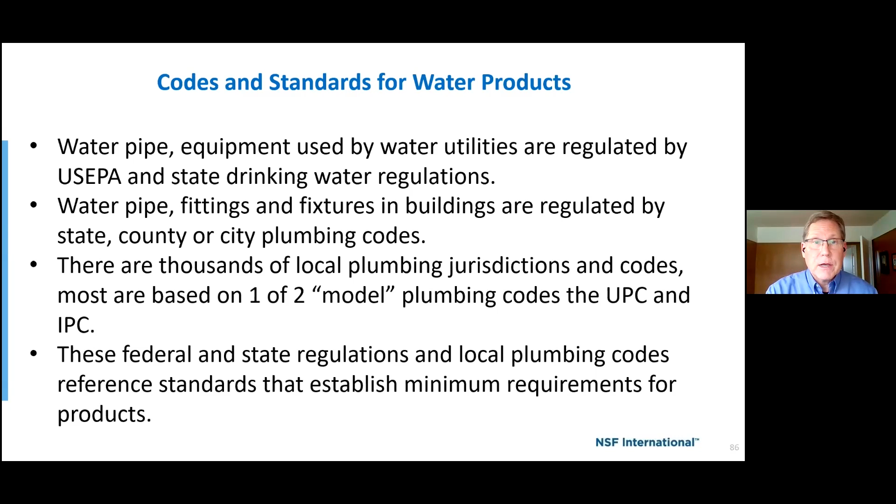And the good news for the plastics industry is that the model codes are becoming more pro-plastic. The international plumbing codes have been very accepting of plastics for the past decade or so, and many of the restrictions on plastics from the Uniform Plumbing Code have been lifted. One of the most recent examples of a restriction that was lifted is related to cured-in-place pipe liners. So these plastic liners were restricted from being used to repair cast iron drain pipe. And this was backed by an effort to encourage replacement of cast iron rather than using plastics.

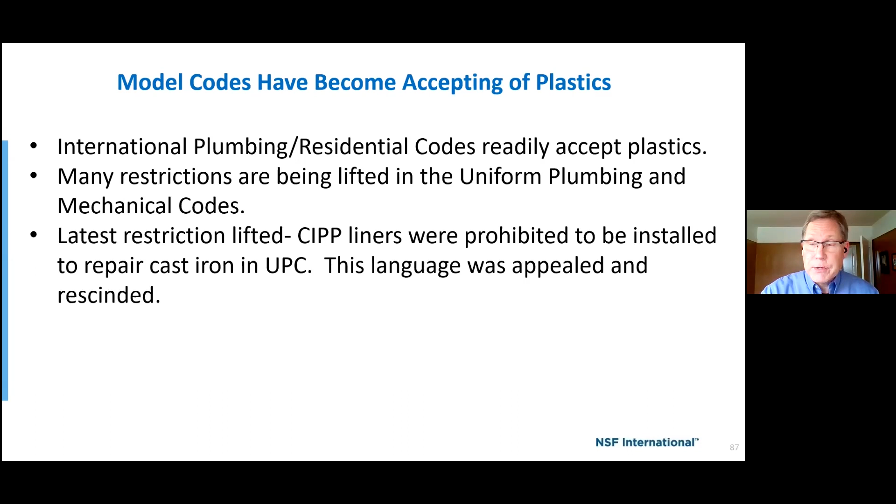So this decision was appealed by the National Association of Sewer Service Companies with the IAPMO Board of Directors, and the restriction was lifted. So I think that's a positive trend. I believe it's getting harder and harder to impose restrictions on plastics for political reasons. But I'd certainly like to hear about your experiences as well. So next slide.

And when it comes to the development of the model plumbing codes, the size of the room has been changing. Over the last decade, the number of people attending the code hearings has been declining. And generally, if you're in the room, you're in a position to be influential. If you're not in the room, you're leaving your fate to others. And the plastics industry has been very well represented over the last few decades, and that involvement has paid off. And now, with all meetings becoming virtual, the size of the room could potentially grow again because participation becomes easier and less expensive to have your voice heard.

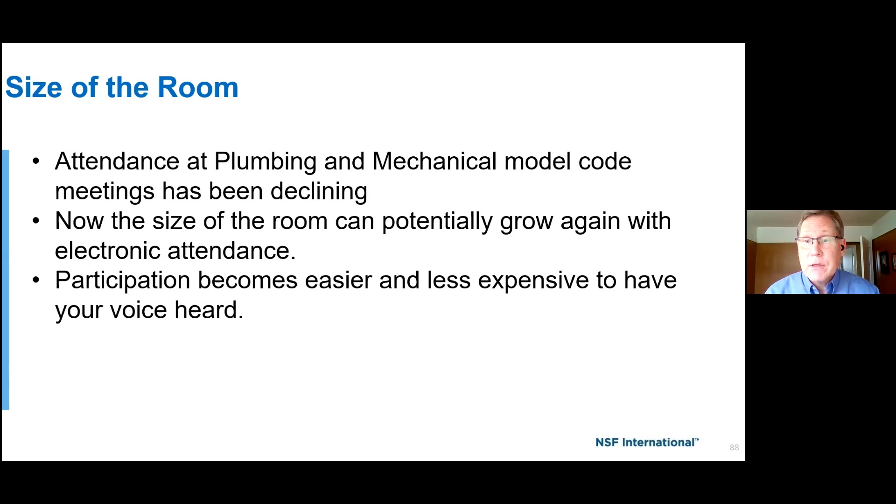Next slide. A significant trend in standards development has been the international harmonization. In the water industry, that started with a push by manufacturers to encourage harmonization requirements of existing standards on both the US and Canadian sides. Now, this tends to be a slow but ongoing process.

The Standards Council of Canada has recently expanded the number of standard development organizations that are accredited to write Canadian national standards. SCC encouraged US standards development organizations to write Canadian standards so long as they have a documented mechanism for Canadian involvement and participation.

So NSF Standard 61, Drinking Water System Components Health Effects, has been an American national standard for decades, but in 2019, it also became a Canadian national standard. And that trend certainly will continue.

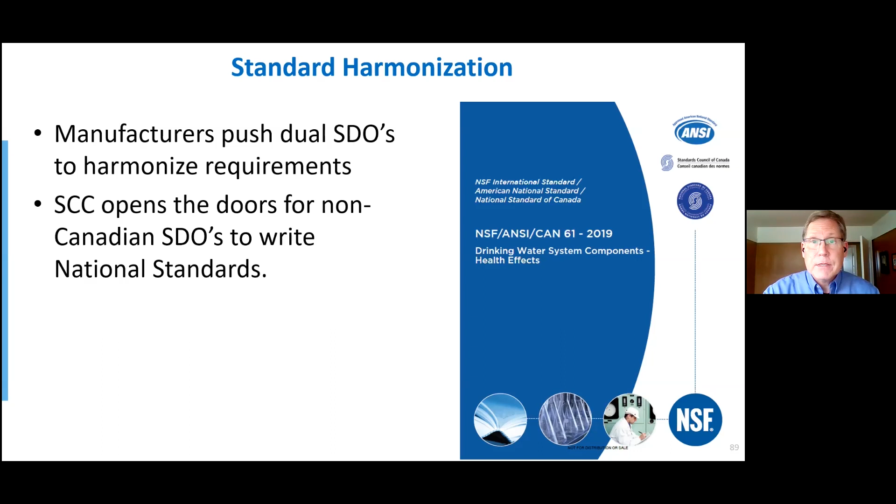Next slide. So microplastics, that's been an issue in the media with implications against both bottled water as well as surface runoff and wastewater effluent. The World Health Organization did a study in 2019 that found no grounds for concern. So this is probably not an issue for the codes at this point.

I should mention, though, the NSF Committee for Drinking Water Treatment Unit Standards, which covers the development of standards for point-of-use water filters, they did form a task group to develop requirements for products that claim to remove microplastics. So if you're interested in that effort and would like to participate in the committee or just stay informed on developments, send me an email and I can get you looped into those task group meetings.

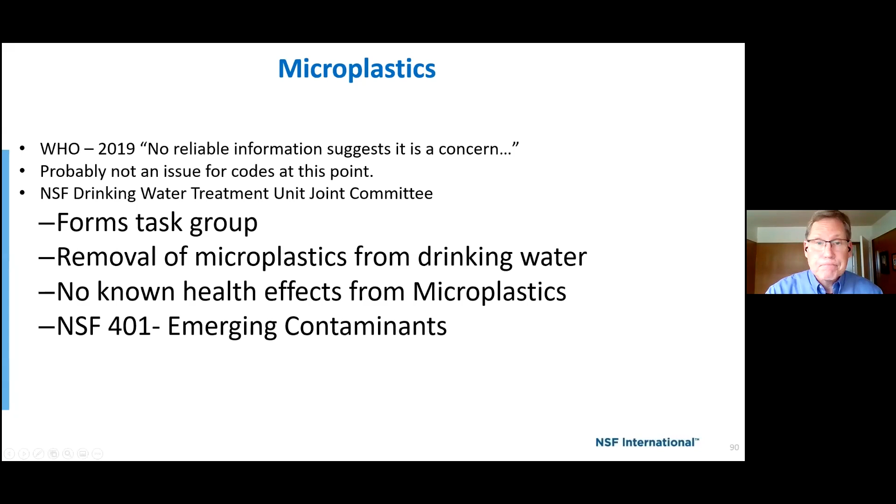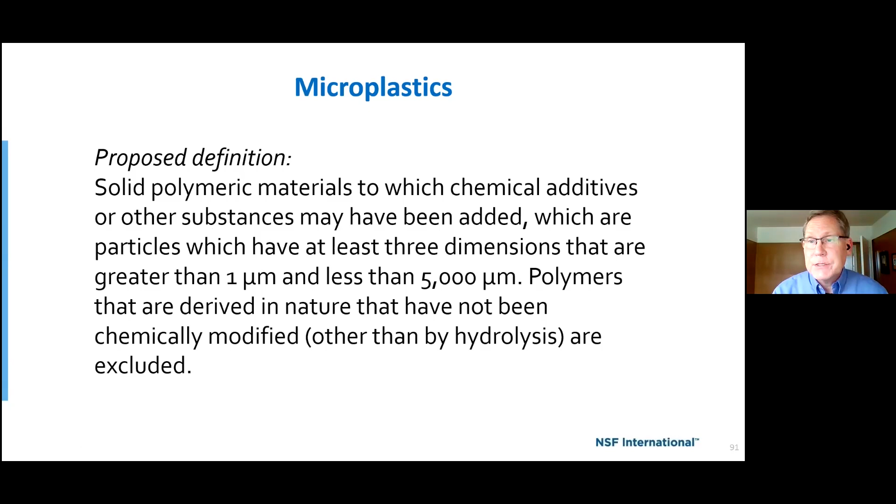Next slide. And the task group also slightly modified the WHO definition of microplastics, limiting it to particles between 1 micron and 5 millimeters in length in each dimension. So next slide.

So NSF has developed several quote unquote sustainability standards for products ranging from carpet to wall coverings to roofing. And as you know, sustainability addresses a combination of economic, environmental, and social issues. So these standards contain requirements for the product, such as life cycle assessment, content requirements, contamination tests, durability tests, and other things that you would expect in a product standard. But what makes them different is they also have sustainable practices for facilities.

So it addresses such issues as renewable energy resources, are there greenhouse gas emissions, what is the waste minimization, in fact, what is the impact of that production facility on the local community? And it can also address HR practices. And then the facility and product are awarded points for each category. And based on that point total, you can achieve a silver, gold, or platinum rating.

Now, there's been minimal interest from industries in obtaining those certifications. And so far, none of these sustainability standards have ended up in regulations or codes. And I think that trend will continue, that the codes will focus on the product requirements and not get into the corporate requirements, the social and the HR practices of sustainability. But I might be wrong, but that's the trend I see.

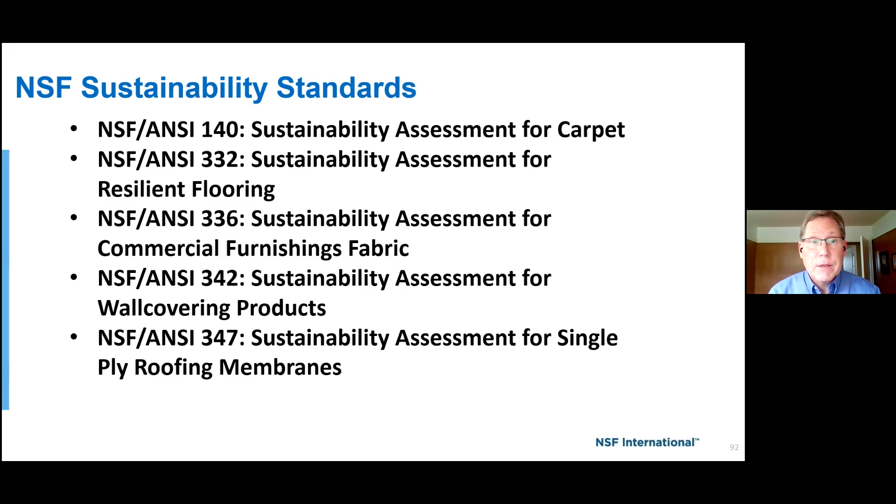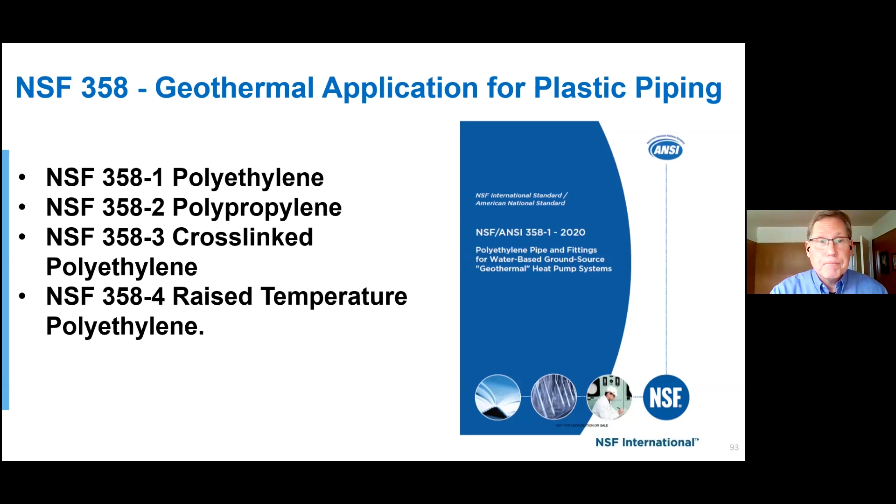Now, where standards are needed is for new applications that come as a result of sustainability efforts. So in this slide for geothermal application of plastic pipe, in an effort to reduce costs and conserve energy, many production facilities have switched to geothermal heating and cooling, which can provide significant energy savings. So in this case, it was a new application of plastic pipe, so standards were created. But in this case, the standard is just setting minimum requirements for the product and not sustainability efforts of the company. So next slide.

There's also a new ASTM standard that I know some of you are aware of for occupational exposure. And this is addressing the potential human health risks from exposure to chemicals in building materials. Now for this, I'm not really sure what the future will hold because there's two issues. One, have all the chemicals of concern been identified? And with supply chains being several layers deep for many materials, how do you know if a certain ingredient hasn't been changed or contaminated? So that's one challenge.

The other challenge is making sure you have the toxicology data and the toxicology risk assessments for specific exposure levels for those specific chemicals. So there's an awful lot of information that would need to be brought together before you could make a practical assessment using this standard. So I don't expect to see it in the codes anytime soon, but we'll see.

Lead continues to be an issue, has been for most of my career in the plumbing codes, although it's an issue that plastic pipe manufacturers addressed early on with banning lead stabilizers. But brass water fittings were allowed in federal law to have up to an 8% lead content until that was lowered to 0.25% in 2014. The US EPA recently issued regulations allowing them to enforce this, which will require manufacturers to have products third-party certified to the low lead criteria, which is stipulated in NSF Standard 372.

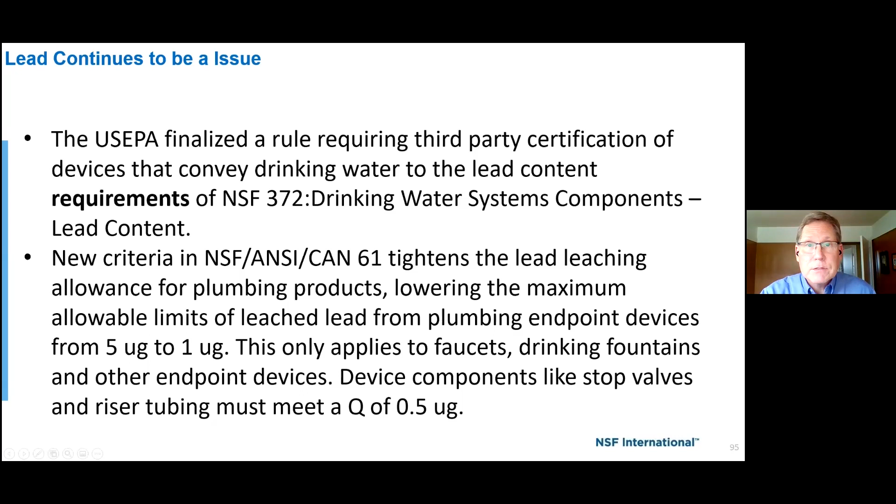Next slide. So increasing water conservation is a growing trend in standards and codes. And today, plumbing products are covered by 3 different agencies. The US Department of Energy establishes flow rate requirements, and those requirements are equivalent to the ASME and CSA standards in the US and Canada. And the DOE is a mandatory national law.

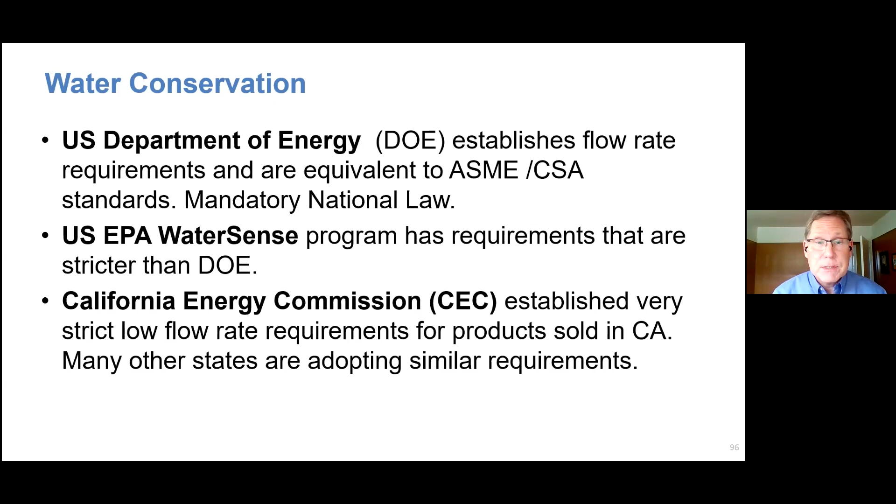There's also US EPA WaterSense, which is a voluntary water conservation program that has set requirements that are a little stricter than the DOE. And then finally, there's the California Energy Commission, which established very strict low flow rate requirements for faucets sold in California, and many other states are adopting similar requirements.

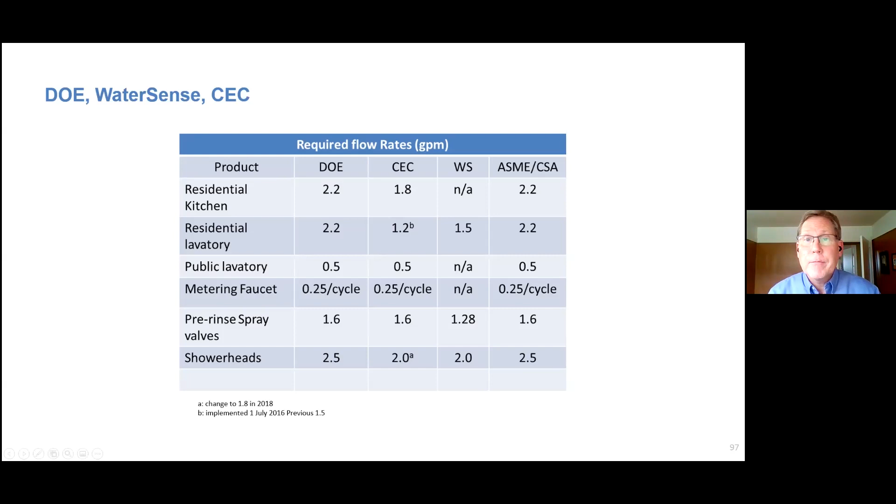So next slide. So this table compares the flow rate requirements for various faucets for the various schemes. So you can see the Department of Energy has flow rate requirements equivalent to the US and Canadian standards, ASME and CSA. The California Energy Commission has the strictest flow rate requirements, and then in between is the voluntary WaterSense requirements. And WaterSense is a partnership program with the EPA and the manufacturer. And WaterSense has developed several criteria that you can certify products to meet the water conservation requirements.

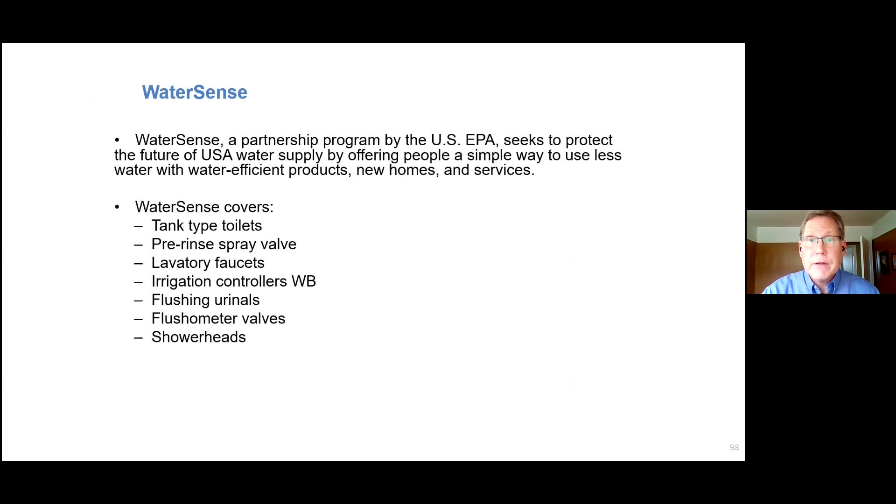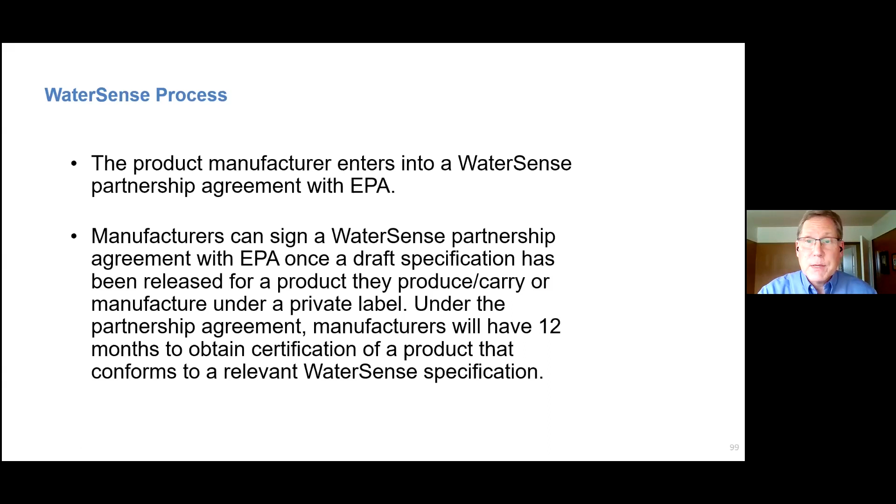Next slide. And the product manufacturer enters into a WaterSense partnership agreement with the EPA. And under that agreement, manufacturers have 12 months to obtain certification of the product to the WaterSense specification. And next slide. And you can have that water product certified to the EPA requirements by an EPA licensed certifying body. And NSF, IAPMO, and other plumbing product certifiers are licensed now to do the EPA WaterSense certification.

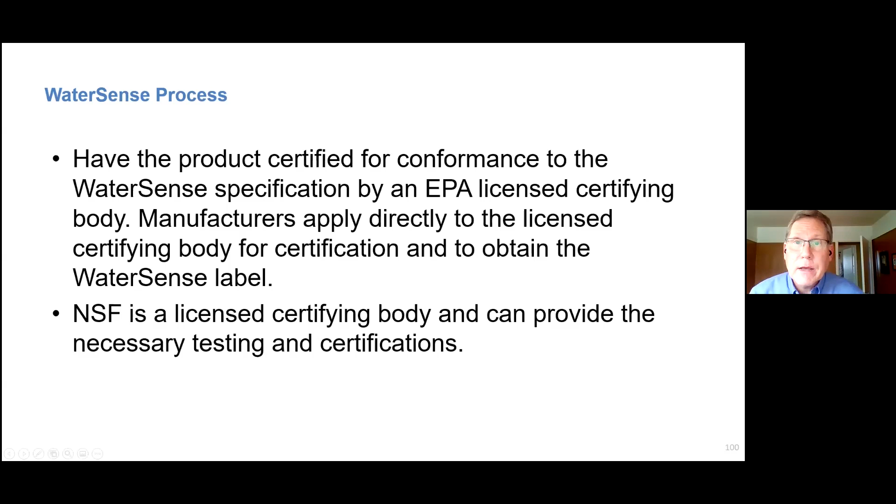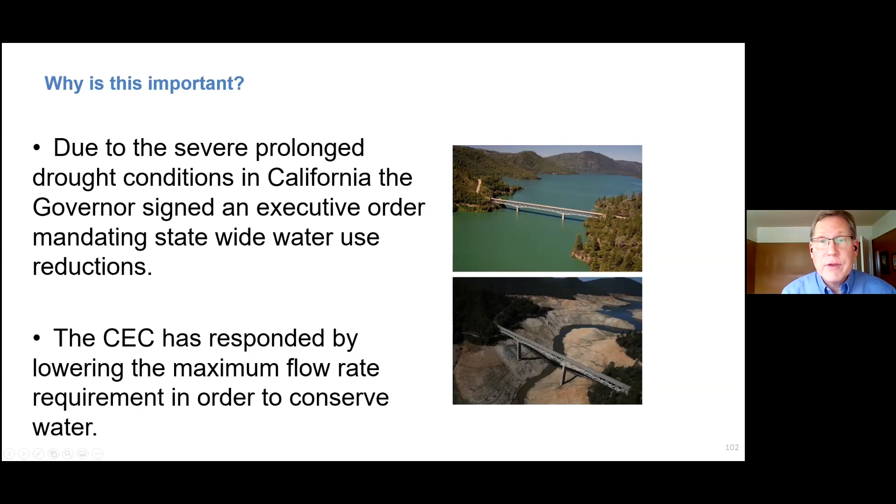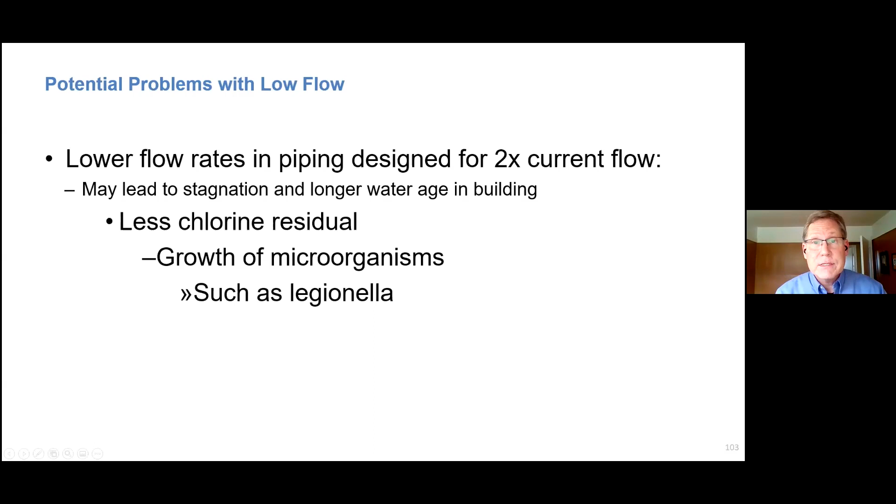And so while we can all support water conservation, there are some potential problems with these lower flow rates. And so lower flow rates in piping that was designed for twice the current flow can lead to stagnation and longer water age in a building. And the longer the water sits there, the more it tends to ambient temperature. So the cold water becomes warm, the hot water becomes warm. There's less chlorine residual in the water. And so it's a perfect environment for the growth of microorganisms. And that can result in Legionella outbreaks. We've also seen similar problems recently with buildings that were shut down temporarily in response to COVID-19.

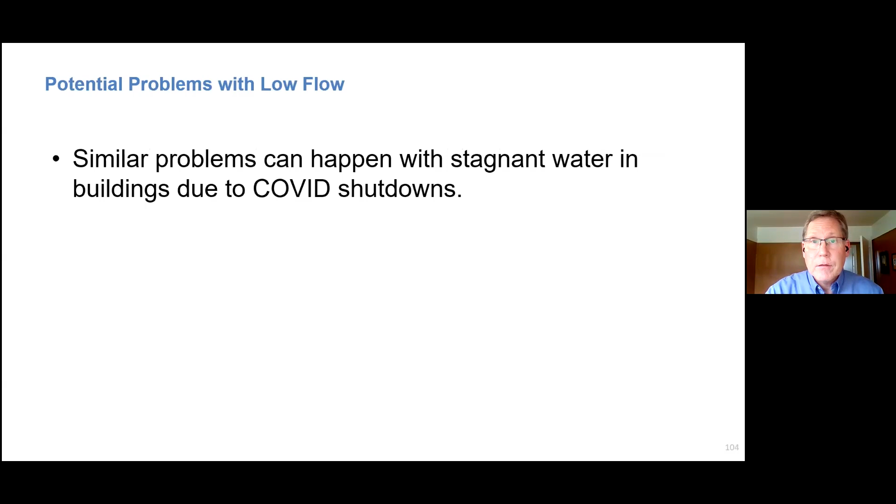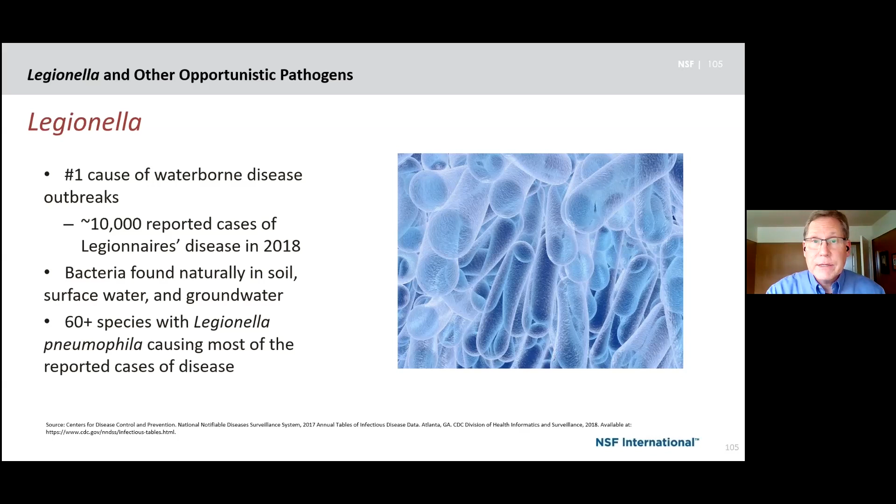So next slide. So Legionella is the #1 cause of waterborne disease outbreaks in the US. There were 10,000 reported cases of Legionnaires' disease in 2018. The Legionella bacteria is found naturally in soil, surface water, and groundwater. And over 60 different species of Legionella have been identified to date. Next slide. And you can see that the rate of infections has increased year on year, with 2018 recording 10,000 or so cases. However, the National Academy of Sciences has estimated that the actual disease burden is about 10 times higher than the reported disease occurrence. So there could be about 100,000 cases of Legionella per year.

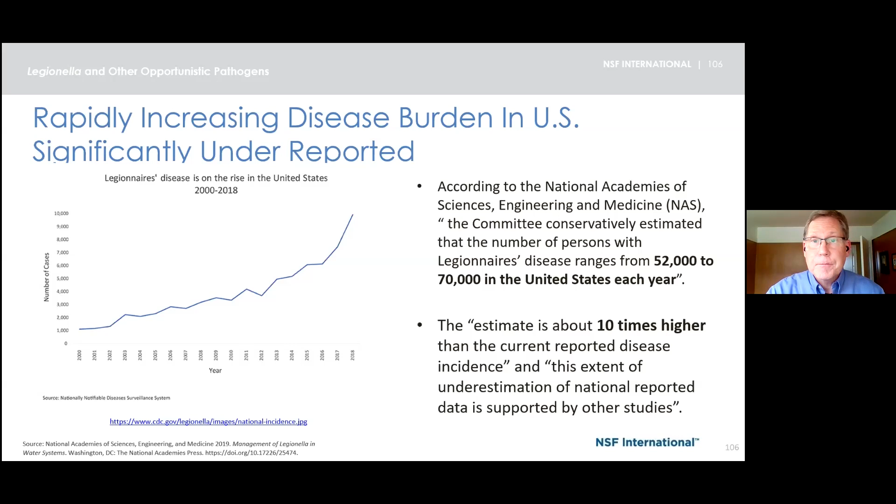And if you go to the next slide, it really compares the risk factors and symptoms for Legionella and COVID. And what you find is they're very, very similar. The risk factors are for the elderly, people with pre-existing lung conditions, smokers and former smokers. Those are the most susceptible. And the symptoms are virtually identical. It's a cough, it's fever, shortness of breath, pneumonia-like symptoms. The good news for Legionella is it can be addressed with antibiotics, whereas COVID-19 cannot. But there is a growing co-infection rate of individuals that either come down with COVID or Legionella and then go to the hospital and pick up the other disease, which then of course requires alternate treatment, requires the antibiotics if you have Legionella.

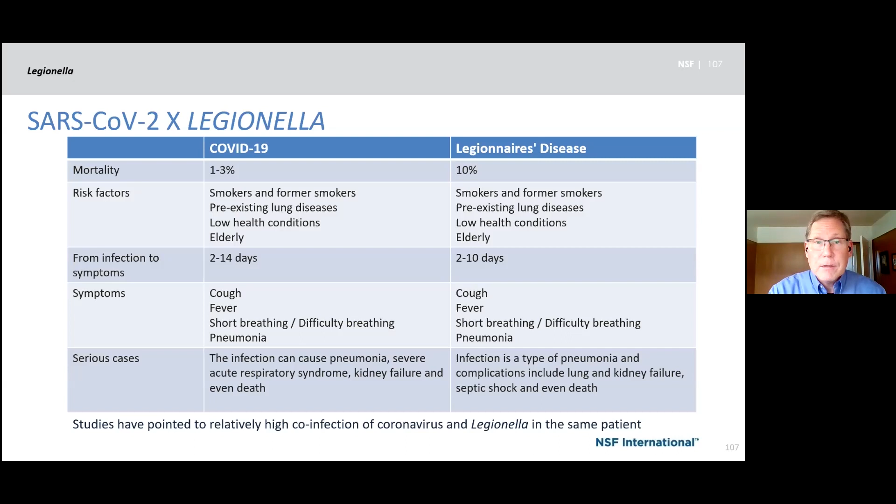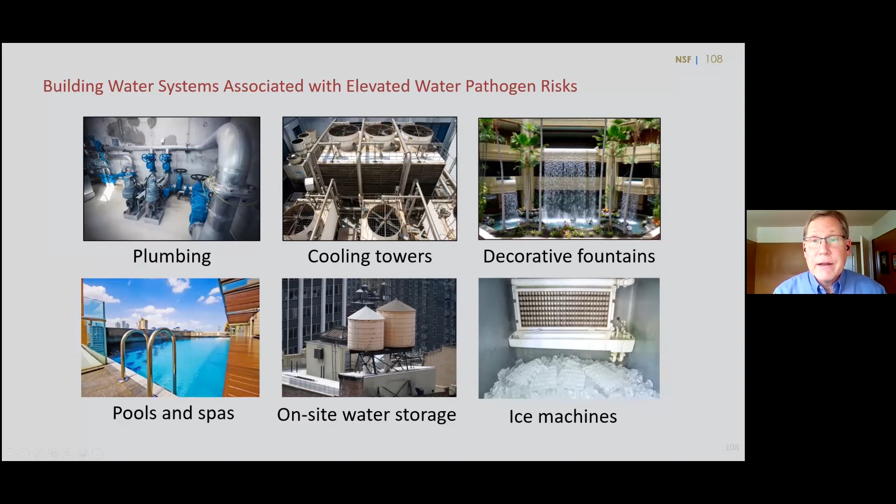So next slide. So the key to control is really controlling the water quality. Legionella thrives in warm water. So the key to prevention is to keep hot water hot, cold water cold, and keep residual levels of chlorine at effective levels. And the CDC in their investigations of outbreaks have determined that at least 9 out of 10 outbreaks could be preventable, easily preventable, with effective water management plans. And the World Health Organization has drafted water safety plan guidelines for buildings to develop these plans to manage the control of microorganisms.

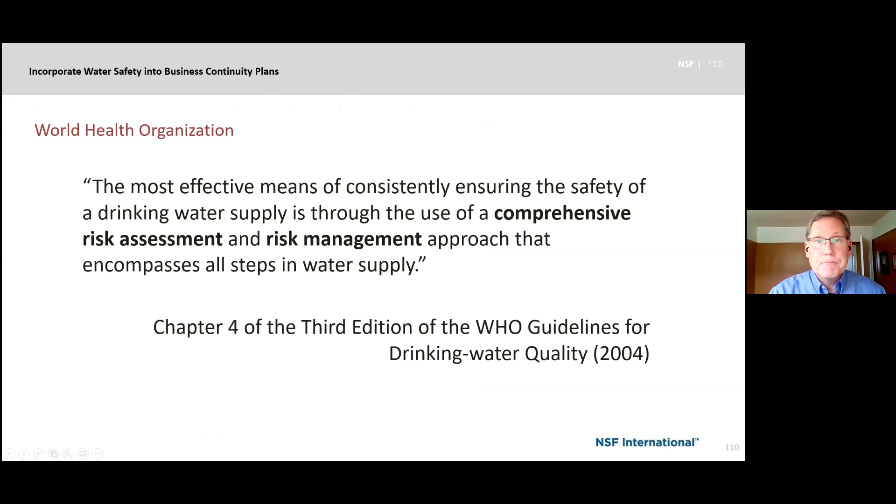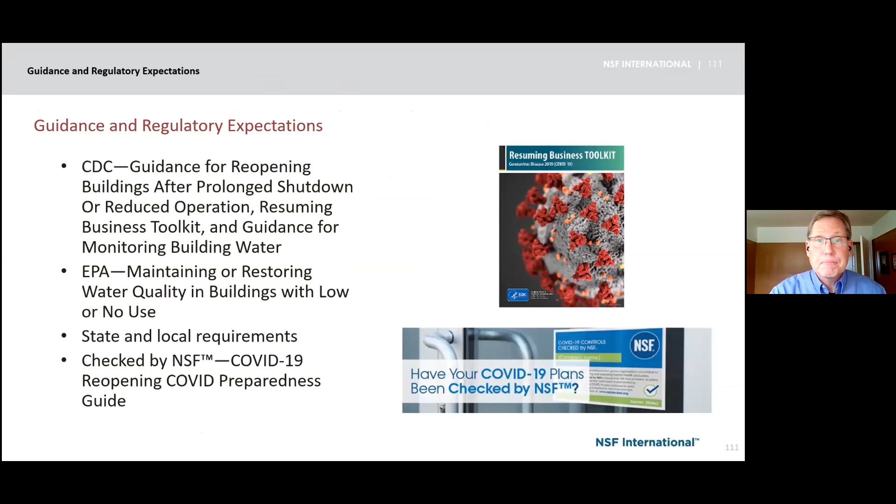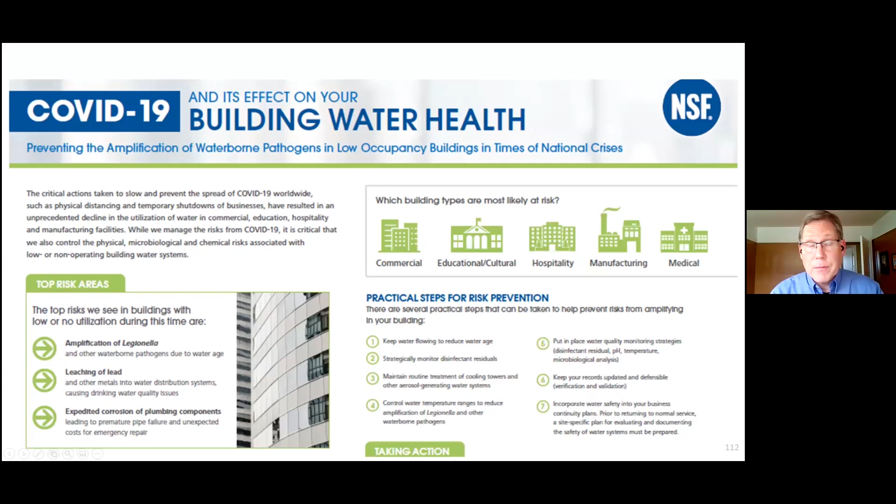Next slide. And the CDC, the EPA, as well as NSF have information on our websites that can help you manage the water systems in your facility. And next slide. And I mentioned NSF has information as well addressing the management of building water systems, and also if you need to start up a building that's been dormant for a while.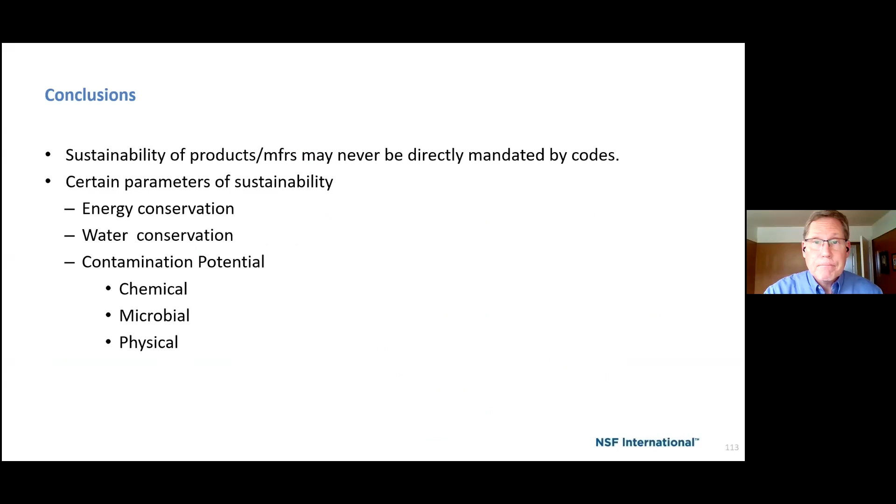And then finally on to conclusions. So really looking at the trends in codes and standards, sustainability of products and manufacturers may never be directly mandated by the codes, but you can be sure that certain parameters of sustainability, such as energy and water conservation and chemical and microbial contamination, certainly will. And then the final slide.

So that's what I have for you today, but I'm certainly willing to take your questions. And again, my email address, if you have questions later on, don't hesitate to contact me. And also, if you'd like to be involved in that microplastics task group for the point of use water filters, just drop me an email and we can get you set up on that group.

Okay, fantastic presentation. Thank you so much, Dave, for sharing all of that great information. While we're collecting some questions, and I'm sure some folks in the audience are going to have some things to respond to there, I've got a few myself.

Sure. One in particular, similar to what Christina Davenport just presented a little while ago. Your presentation noted the unintended consequences of water conservation efforts. Right. So in general, this continues to be a dilemma for our industry, where a lot of times hazard-based approaches to sustainability in one area could lead to unintended consequences in others, which could negatively impact public health or climate health or even economic equality. So my question is, to what extent does NSF seek to ensure a comprehensive multi-attribute approach to developing these sorts of sustainability standards to ensure that those risk factors can be properly mitigated and avoided?

Yeah, absolutely. It's crucial because water conservation is important, but if you're putting in those water conservation measures, you also have to have the remediation measures in place for any of the unintended ill effects. So the problem is pipe sizing hasn't changed for 50, 75 years. Pipes are still the same size, and yet the amount of water going through the pipes in buildings today is half of what it was 50 years ago. And so we need to downsize the pipe size so the water continues to flow through. But obviously that would take a lot to remediate all the buildings in the United States.